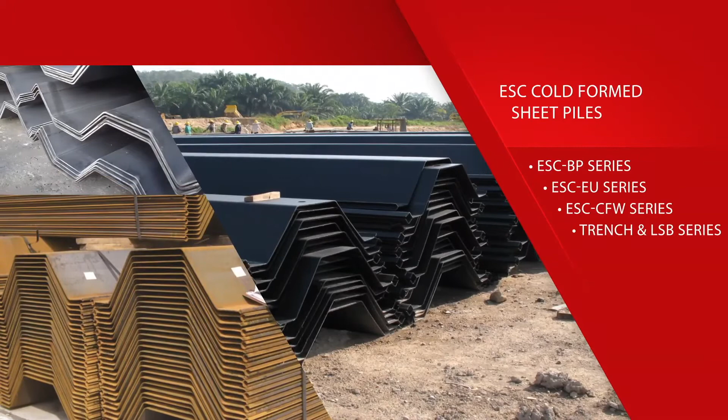Hot-rolled Z and U profile sheet piles in BS and ASTM steel grades. ESC cold-rolled Z and U profile sheet piles up to 16 mm thick. ESC proprietary designed cold-form sheet piles at up to 25 mm thickness. Steel pipe piles at up to 100 meters length, over 3 meters diameter, and 100 mm thickness.

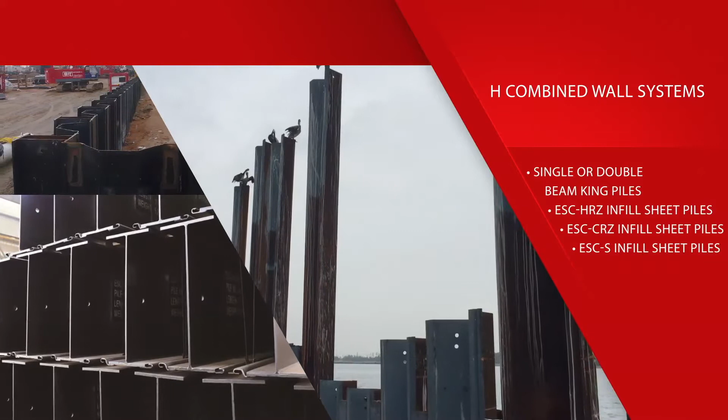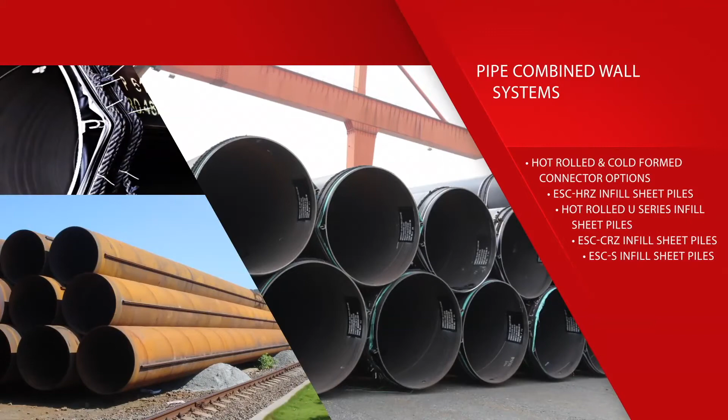H-pile combined wall systems with king piles over 1.1 meters height and 3 options for infill sheet piles and connector types. Pipe pile combined wall systems with king piles over 3 meters diameter and 3 options for infill sheet piles and connector types. ESC's range of vinyl sheet piling provides a modern alternative to steel sheet piles, offering superior corrosion resistance and a lightweight profile for easier handling and installation.

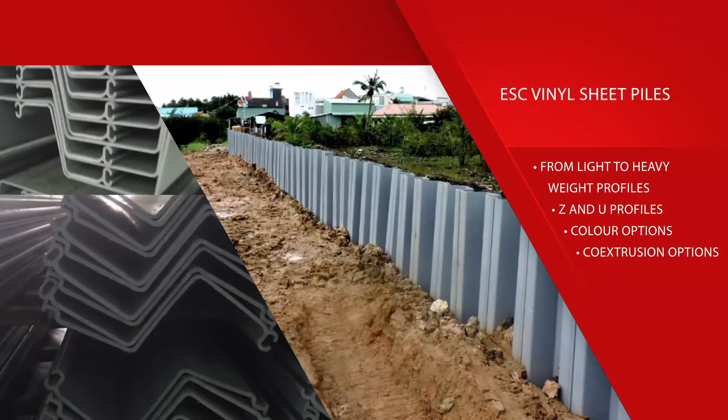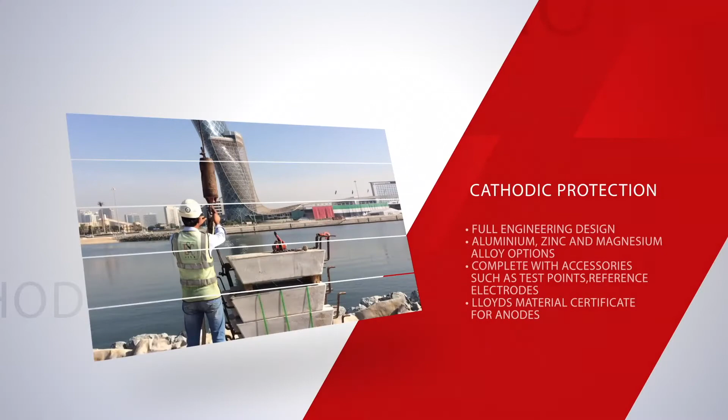Complete tie rod systems with a range of connections for articulation and tensioning, with options for galvanization or coating. Cathodic protection systems including professional engineering design, commissioning and installation to NACE, DNV and British standards. Corrosion protection services including blasting and coating to SSPC and NACE standards. Marine fender and mooring bollard systems designed and manufactured to PIANC guidelines.

Trench box shoring systems with third-party design verification and testing. And a wide range of accessories such as hot-rolled and cold-formed connectors, pile driving shoes, sheet pile interlock sealants, pile driving guides, prefabricated waling beams, remote release lifting shackles, shear rings, tie rod connectors, and more.

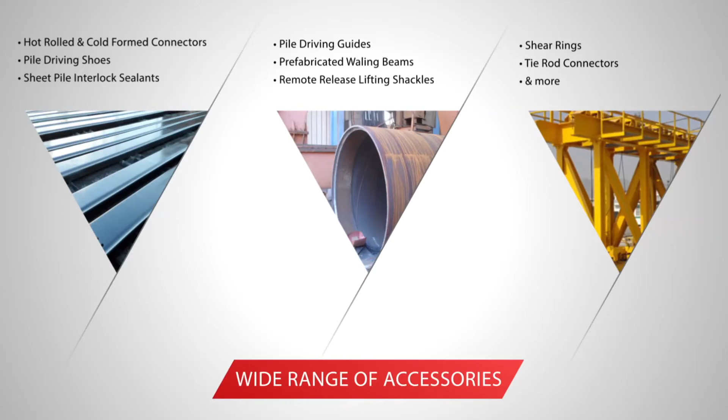Over the last 5 years, ESC has expanded its capability to structural steel fabrications that meet various international standards. Each of ESC's global offices has a close-knit professional engineering team in close communication to deliver a technical service that exceeds customer expectations. ESC utilizes engineering software such as Plaxis, Reward, KREA, AutoCAD, Inventor and Tekla Structures.

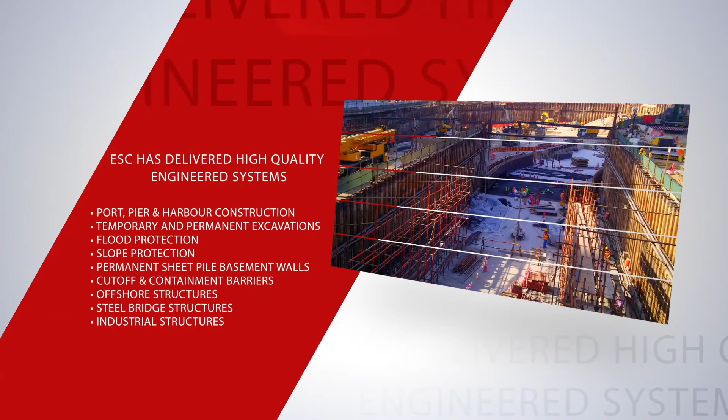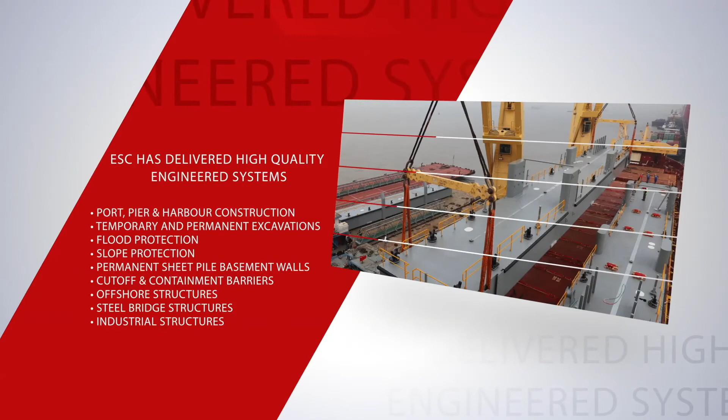ESC has delivered high-quality engineered systems to port, pier and harbour construction, temporary and permanent excavations, flood protection, slope protection, permanent sheet pile basement walls, cut-off and containment barriers, offshore structures, steel bridge structures, and industrial structures. Hundreds of thousands of tons of ESC products can be found all over the world, supporting global infrastructure.

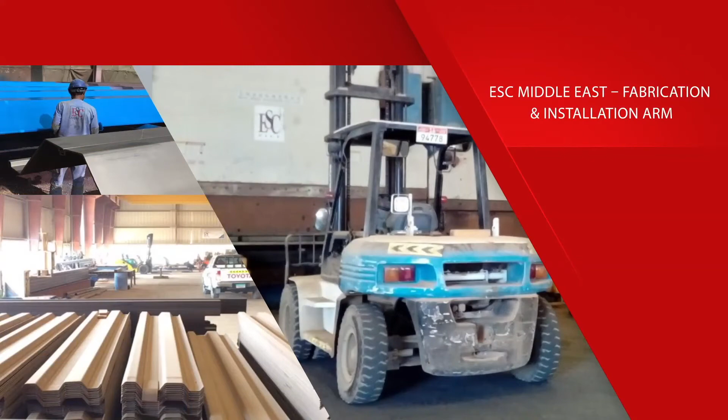ESC's Middle East arm is one of the premier installation contractors in the region, with a well-maintained fleet of piling rigs, vibro hammers, mobile cranes and trailers. ESC's fabrication yard, blasting and coating facilities, and a large sheet pile inventory with a refurbishing facility make it the go-to piling contractor in the Gulf region.

Recent projects undertaken by ESC include Fujairah OT2 Phases 2 and 3, UAE; Watco Breakwater Berths 3 and 4, United States; Port Lafito, Haiti; Port of Everett, United States; Kaohsiung Port, Taiwan; Baynunah Tunnel, UAE; Malacca River Beautification; Veracruz Port, Mexico; Hinkley Point C Aggregate Jetty, United Kingdom; Mare Harbour Upgrades, Falkland Islands; Barrow Island Loadout Jetty, Australia.

Visit our website for further information and contact your nearest local ESC expert team to discuss your project needs.